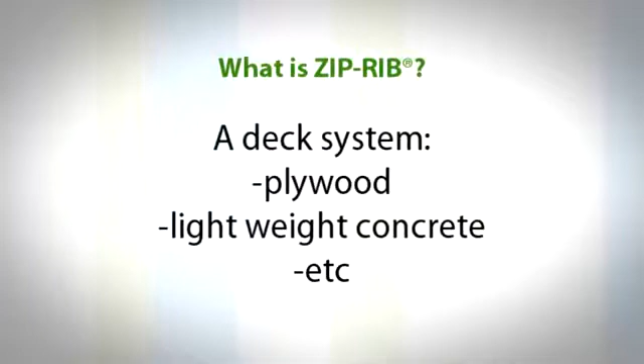A structural roof system can be utilized in both open purlin and low slope applications, or over a deck system, which could be plywood or lightweight concrete, etc. ZipRib has developed a unique application of a two-piece clip, which is seamed integrally into the standing seam rib to not only allow for thermal movement, but to resist severe wind uplift forces.

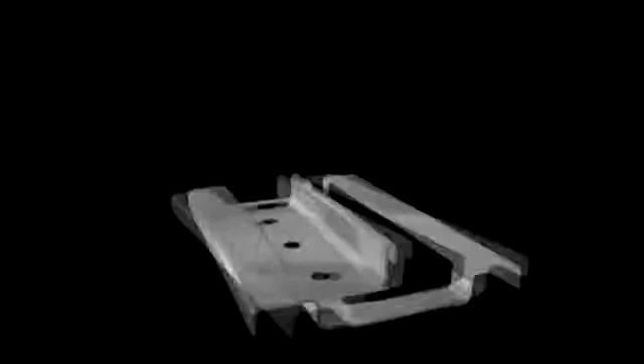There are modifications to that standard clip to deal with higher than normal loads and/or expansion and contraction requirements that exceed what the standard clip can withstand. Here you can see an example of our two-piece clip where the top piece is always stainless steel. The bottom piece can come in either galvanized or stainless steel for high corrosive environments.

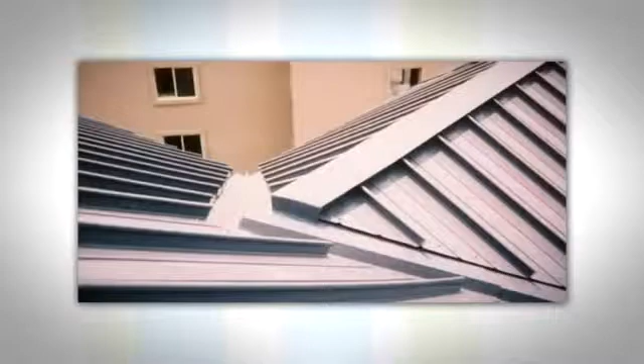Thermal movement can be accommodated in both directions with the ability to install multiple locations for fixed points. The panel is fixed to the structure at one point, and thermal movement takes place in either direction from that fixed point. ZipRib has been used successfully on a multitude of complex projects throughout the United States and the world.

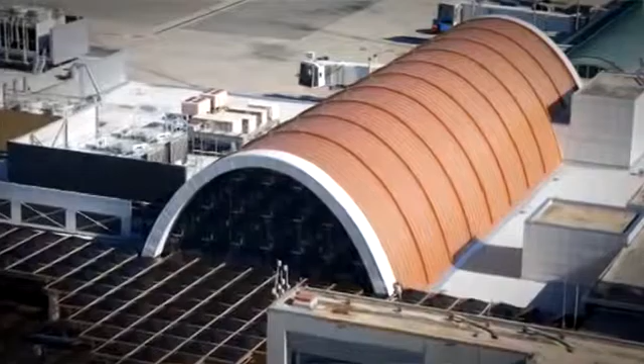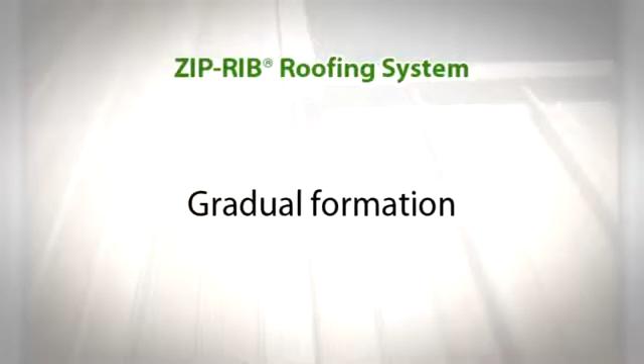ZipRib has been very popular in the application for airports. Here, in combination with our BD 1520 profile, you see ZipRib on the Louis Armstrong Airport in New Orleans, Louisiana. The ZipRib system is manufactured with no 90-degree bends, is less likely to oil can, and is manufactured with 18 sets of tooling to gradually form the panel into its shape without introducing stress into the metal. All of this allows us to use higher strength materials because of the shape of the profile.

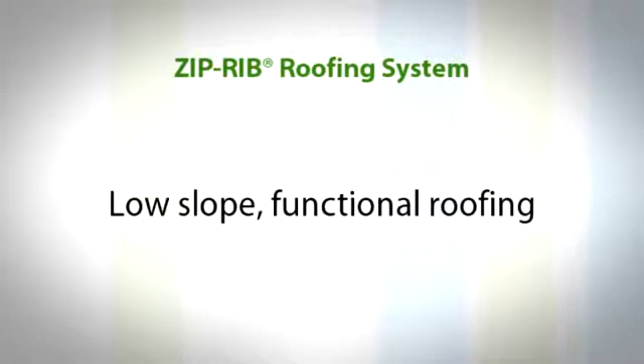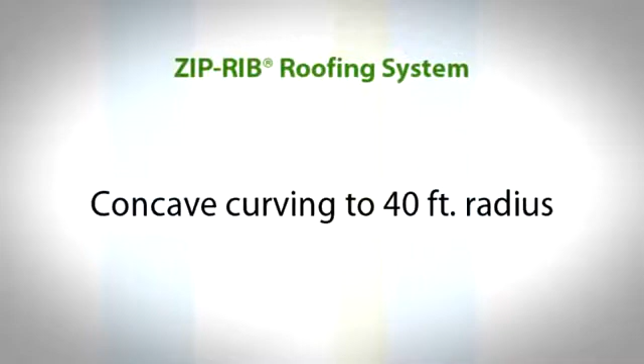Here we illustrate some of the roofing applications that we have used ZipRib in. It can be used on low-slope functional roofing, sloped architectural roofing, convex curving to 6-foot radius, and concave curving to 40-foot radius. It has been used successfully in taper designs. It has been used in open purlin construction, solid deck construction, and in a variety of material including steel, aluminum, copper, zinc, stainless steel, and lead-coated copper.

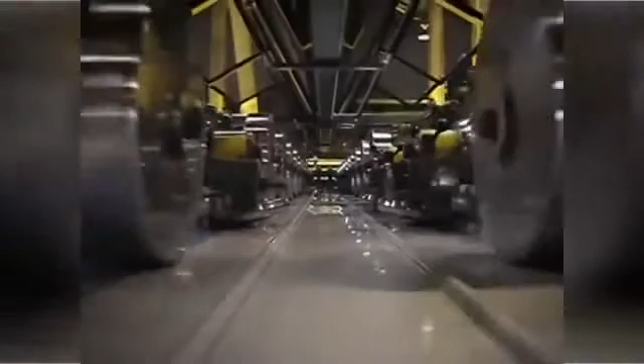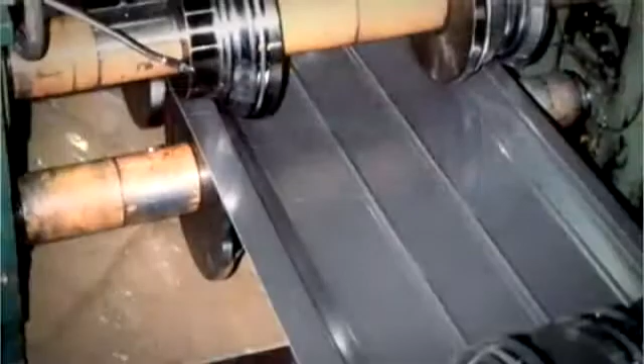The unique roll former that Merchant & Evans uses to fabricate ZipRib products is an 18-station in-house roll former that gradually forms the product to reduce the stresses in the metal. In addition to the roll forming stations, Merchant & Evans uses a factory inline leveler prior to running the coil through the roll former to additionally level the metal. You can see our ZipRib product being rolled in the factory in New Jersey. Here is another view of product being rolled in our factory in Arizona.

ZipRib can be seamed and unseamed on the roof. In other words, it can be zipped up and unzipped. This unzipping allows for the non-sequential process of removing the panel, which means that we can replace individual panels in various locations on the building if they become damaged or need replacement, without disturbing the adjacent panels.

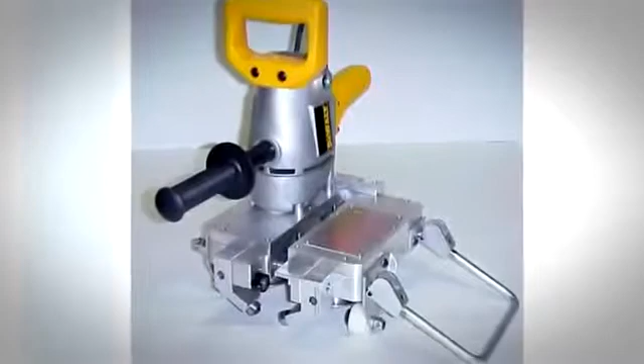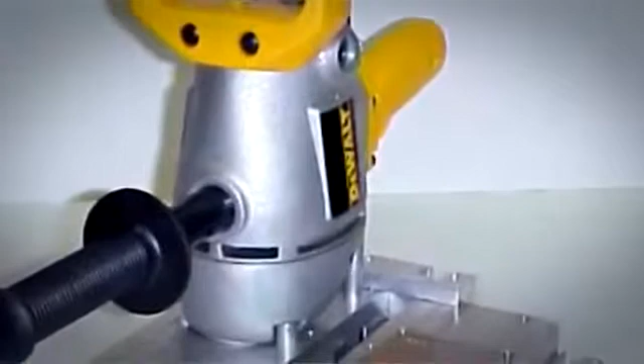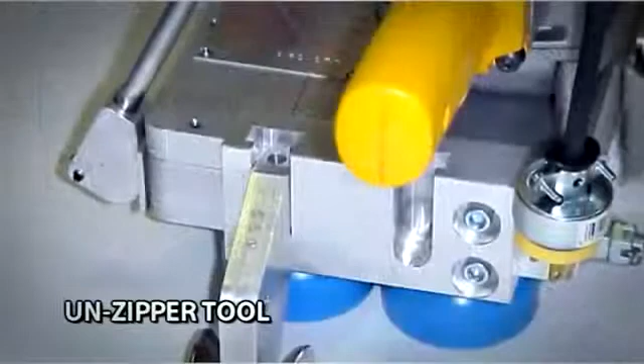Zipping and unzipping are done through the use of a zipper tool, which sets the standard in the marketplace. It is a lightweight tool, weighing approximately 35 pounds, that not only will zip the panel from eave to ridge, but will zip it ridge to eave. In addition, this zipper tool is designed to run vertical applications for those places where ZipRib is used on fascia or siding application. In addition to the zipper tool, ZipRib has developed the ability to unzip it with the unzipper tool attachment placed on the back of the machinery.

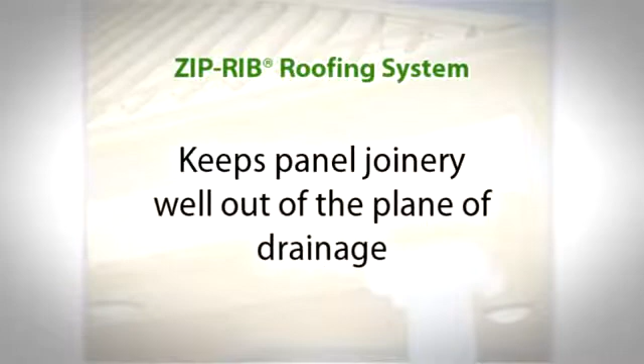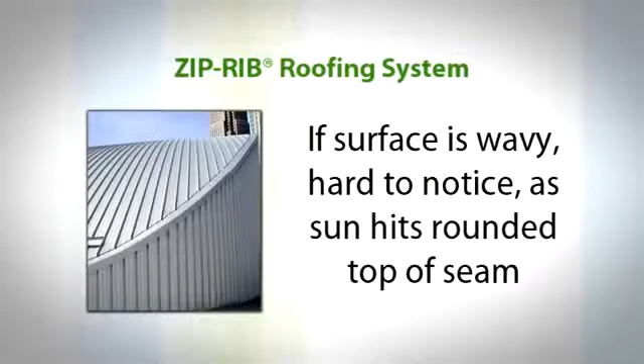The ZipRib roofing system is a 2.5-inch tall standing seam shaped like a modified I-beam, which keeps the panel joinery well out of the plane of drainage, which is important if it snows or rains where your project is located. The finished seam is a tube. If the surface is wavy, it's hard to notice as the sun hits the rounded top of the seam, and the ZipRib product is approved down to 1/4 inch in 12 pitch.